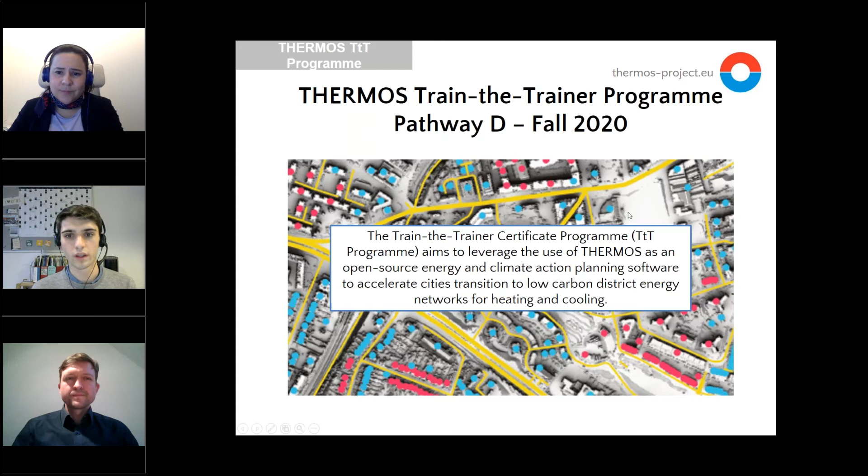So as you already know, this program was divided into 3 different sections. The first was some webinars like the one you are attending right now. So it all started the 29th of October with the kickoff. Then we had a second webinar on the 12th of November about embedding THERMOS in university. And now we have finally our final webinar today. So we hope that you could attend all or most of these webinars. And now we can say with this smiley face that this part is completed.

Also, you had two options for doing the training. The one that most of you selected was option A, completing the 3 exercises. And we already received your exercises. Thank you for your hard work. So we are getting another smiley face here because this is completed. And finally, option B, which was selected by a few of you, was developing a case study with THERMOS. So this also came to an end already. So we can say that finally our Train the Trainers program is finished and complete with this final webinar.

And now, so that you can see a bit the numbers on the results of the program overall. Well, before, of course, you're getting a certificate for completing the program. So congratulations for that. We will talk about that later. And now, as said, I would like to show this graphic you can see here with the numbers of all the different trainings we had in these past 2 years.

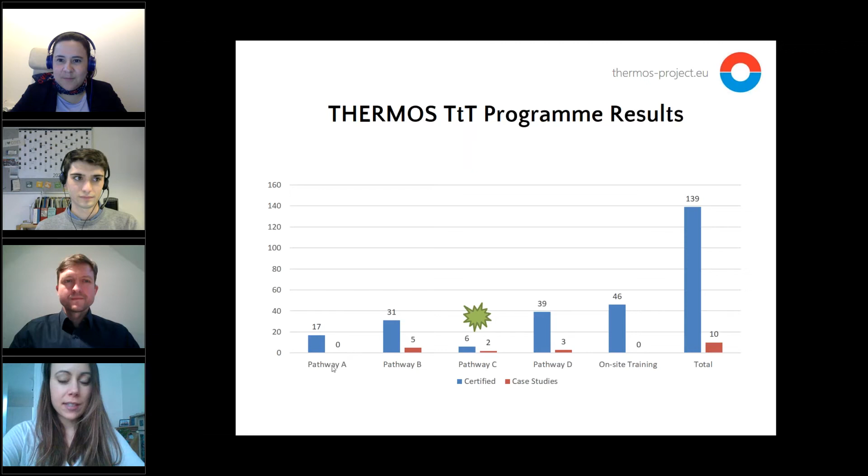Thank you, Julian, for presenting the numbers. Like you said, we're really happy about all the great engagement with you. And having said that, I'm very happy to give the word to 2 of our outstanding trainers. The first one is Luis. I hope I pronounced it correctly. He was a trainer in our previous program. And he's exceptionally committed because he also did a training with our partner city Cascais. So he's really a renowned expert. Please tell us more, Luis, about your case.

Hi, good afternoon to all. It's my pleasure to be here and try to represent Cascais and the case study that I developed in the previous Train the Trainer session and workshop from THERMOS. And again, thank you for the invitation.

I will try to present my, let me. I don't know if I'm allowed to present my screen. I think you should be. Okay, I will show you my screen. Can you just check if you are? Yes, we can see it.

Okay, so I'm here to present the case study for Cascais, Portugal. This, like I was saying, was developed in the previous training pathway. So besides everything that you already know about THERMOS, it is free web-based software to design and optimize district energy network planning processes. And besides all the objectives that you already know, I think the key additional uses that the tool can support are to analyze key solutions for greenhouse gas emissions and air pollutant emission reduction solutions for the city regarding the heating and cooling supply.

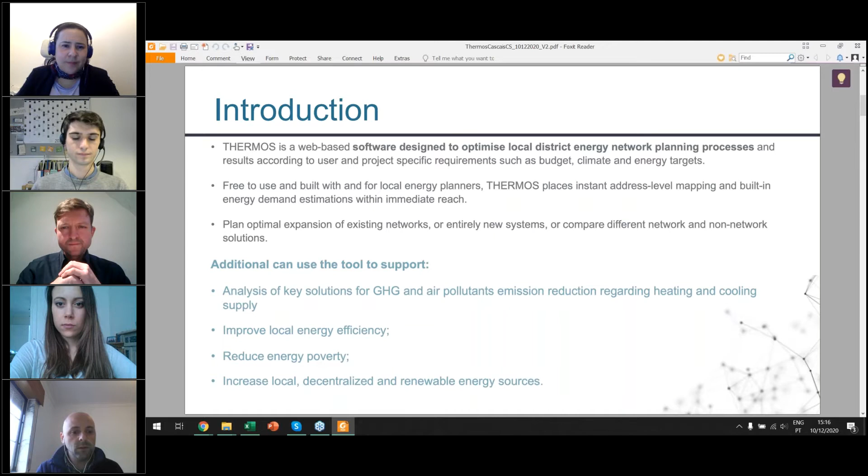It also helps you to identify, in what concerns heating and cooling, how to improve local energy efficiency, also in buildings. And also really important, it can be used to analyze how to reduce energy poverty in the municipality or in the city or the region that is under the cover of the network. And as more general objectives, it can help to increase the local and decentralized renewable energy sources.

And talking specifically about the case of Cascais. I will present where it is for those who don't know where Cascais is. Cascais municipality has been actively engaged in both promotion of energy efficiency and support of innovative and sustainable solutions at the city scale. In terms of climate goals, Cascais is also part of the Covenant of Mayors, and they set a goal to reduce by at least 40% the greenhouse gas emissions by 2030.

But of course, Cascais is really active in this matter, so for the city it is not enough. So they have also implemented climate action policy on the adaptation side. So if things get worse, they are already planning how to adapt to climate change. And regarding mitigation, they are also aligned with national pledges that are really strong for carbon neutrality. So the city has developed a carbon neutrality plan by 2050.

And also in line with the national pledges regarding energy, the municipality is developing the local energy strategy with a 10-year implementation period that is in line with the national energy and climate plan. So this is just to give you an overview of the energy and climate goals that the city is setting.

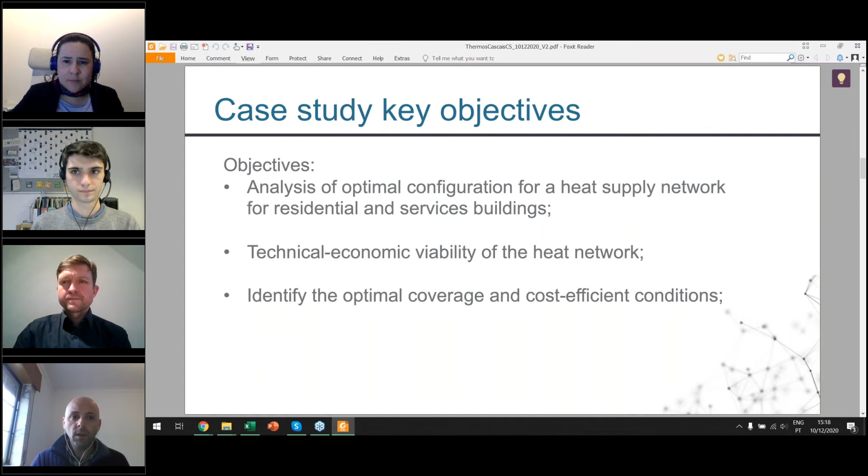So the location of Cascais. Cascais is located in Portugal, near the capital, Lisbon, that is more or less here, and is a relatively medium-sized municipality with around 200,000 inhabitants. And the specific case study was located in Carcavelos, a parish of the Cascais municipality. So Cascais municipality is all of this, composed of 4 parishes. This was revised some years ago.

And the case study is one of the regions here that is close to the sea, and it is experiencing a high urbanization rate, so the population living there is increasing. Also, I provided here on the right side two maps that basically show the climatic zones in Portugal, just to show that Cascais is not located in the region with the highest necessity for heating, but more importantly for cooling.

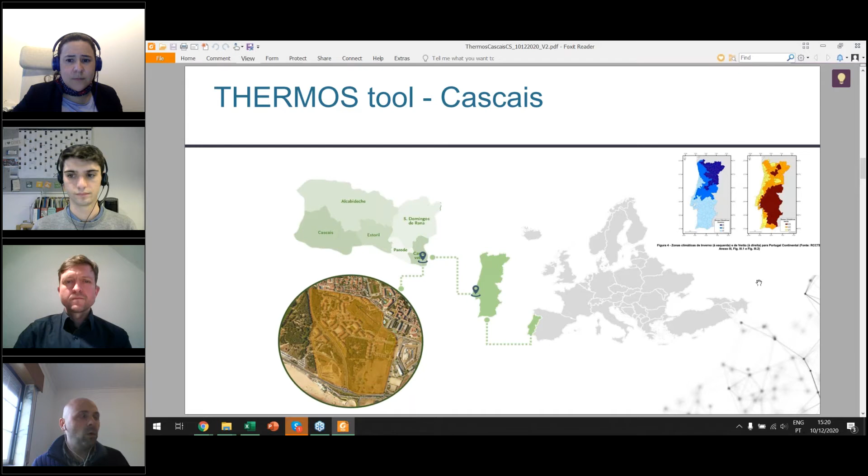Nevertheless, this can be the case study. The importance of this kind of district heating is also relevant for the municipality to analyze what can be the optimal conditions for this kind of possibility for availability of heat for the population.

Here is the map that I developed with the THERMOS tool. So this region, Carcavelos Sul, is an urban area located in the south of the Carcavelos parish, like I was saying. It is composed of residential and service buildings. This is really important because it gives insights into the conditions of buildings with mixed uses, so consequently mixed demands. And the area is around 47 hectares, so it's quite small, and has around 1,500 households and 2,500 citizens.

This is important in terms of more technical conditions. The municipality provided me the shapefile, so I didn't use the default information in the THERMOS tool. This is quite relevant because I had really detailed information about the buildings located in this region.

So, like you already know, and you already did in your case studies, the first stage is the characterization of the initial conditions on both the demand and supply sides. In terms of demand, I identified and classified all the buildings to be part of the network. Like you say, you can classify them as required, optional, or exclude buildings from the solution. And also, you need to characterize the energy demands.

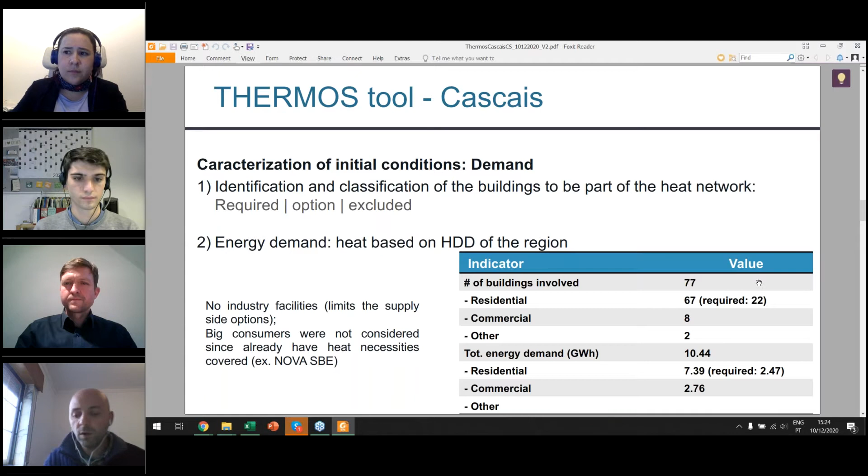That, for instance, there is a new university located in this region, but it was not considered because they already cover their heat necessities with other technologies. Also, the characterization of the initial condition on the supply side. Like I was saying, we don't have industry, so we didn't have the possibility to use heat from industries.

So what we made, we added a new possibility for supply. In this case, combined heat and power plants supplied by natural gas with a maximum capacity of 10 megawatts with different parameters in terms of cost. I will not enter in detail, but you can see it here. Also, the associated emission factor with natural gas. And also, we made the connection of the supply facility with two possibilities to connect, because it was important to try to analyze which routes the model chose, depending on the region or the buildings that the model chose to cover in terms of heat.

Also, really important, we tested two scenarios with tariffs. So two prices for heat, and the two prices were obtained from publicly available information for the only company in Portugal that owns a district heating network in Portugal, Climaespaço. So we used two scenarios with prices from 2015 and 2018. One of the prices is higher and the other one is lower, just to analyze the effect of this variability in terms of price on the configuration of the heat supply network.

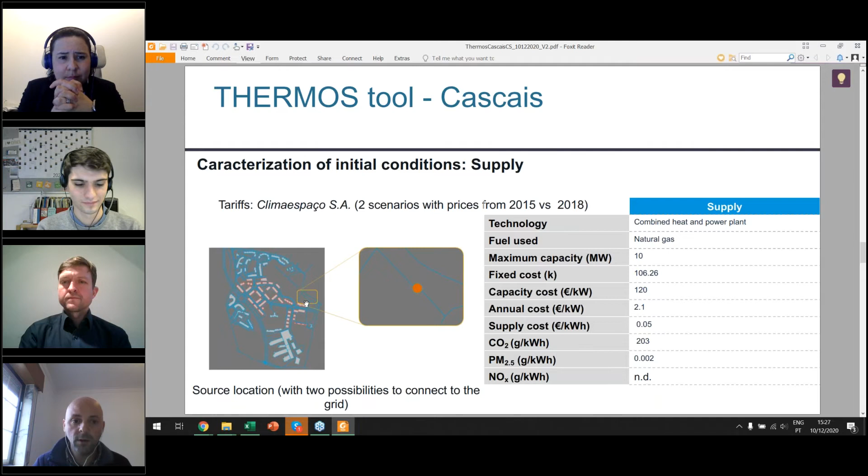Other really important parameters were the technical economic parameters for pipelines. They were different depending on the roads or area characteristics, in terms of hard and soft. This is also default information by the model, but this information was further aligned with other case studies at the time, Granollers, and we aligned this information with their case study, because these are really important parameters for the results of the model. Also, I included insulation measures for walls, roof, and floors from a European project that's called Prioritee.

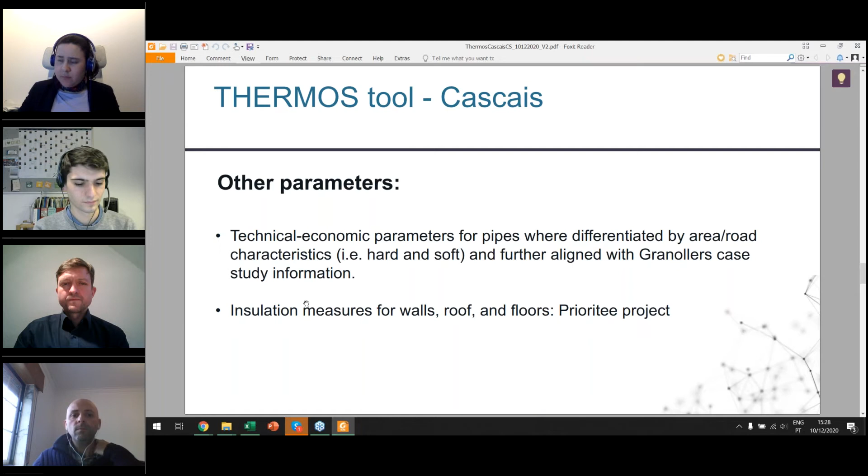In terms of results, after some difficulties in achieving an optimal result because of some networks that were not totally linked, in the end the results were quite good, and the model provided a solution for a network that was able to cover 34 buildings, and the interesting part was the 22 required, of course, but also the network covered 12 optional buildings. The majority of the buildings included in the solution were mixed use, residential and services, and the network covered 44% of the demand. So this means that more than 46% of the buildings that were classified as optional were included in the solution.

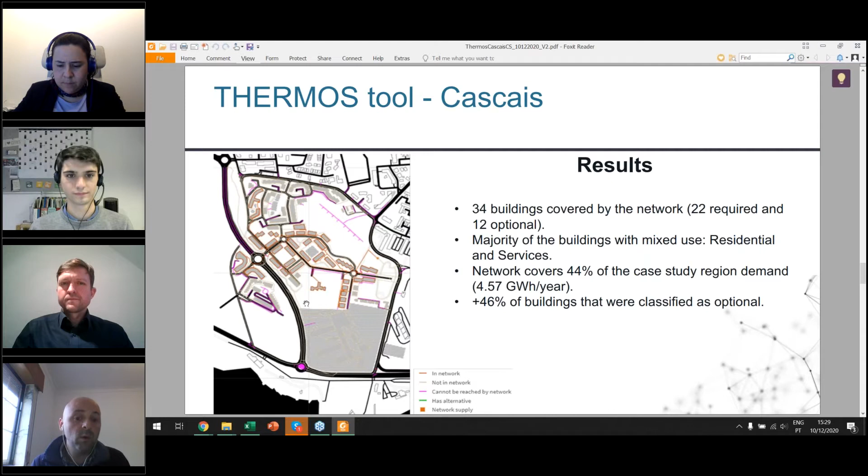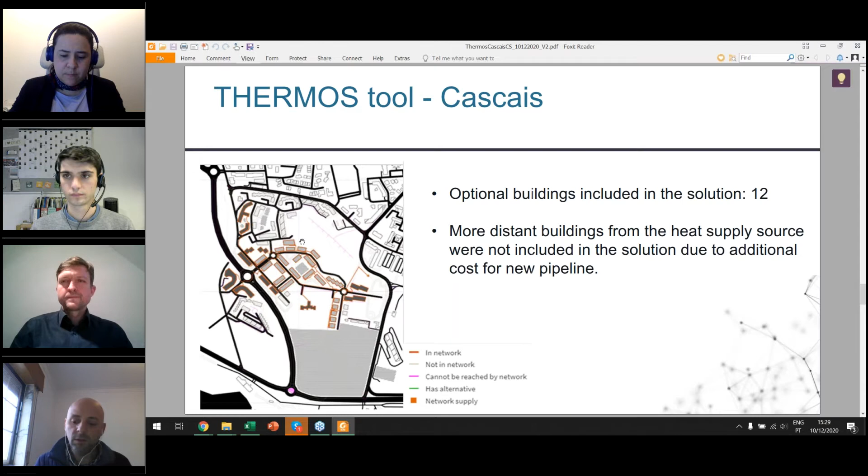So like I was saying, the optional buildings that are here in the figure in dark gray were 12 buildings, and the more distant buildings from the heat supply source were not included, because to include these buildings that are more here in the north part will require additional pipeline, and so additional costs, and so the model didn't provide this solution.

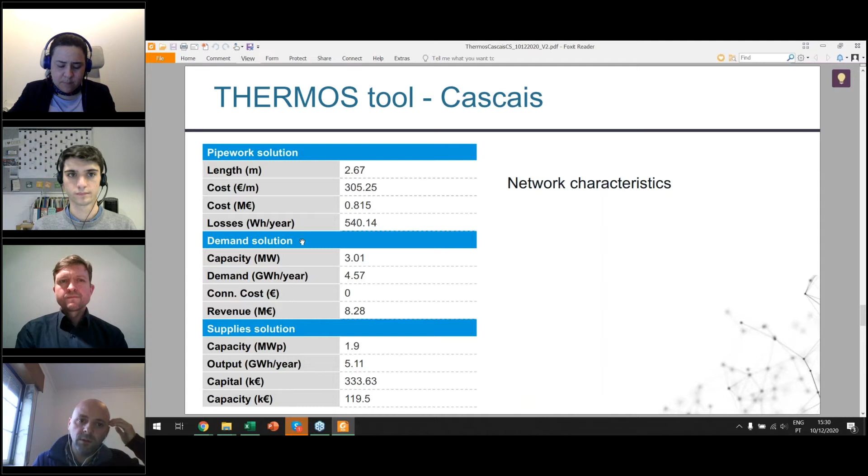This is just a list of the characteristics of the network. I know that in this new version of the software, you have this information more organized. But basically, this is just the solution that we obtained from the software, the cost, the demand solution that I was talking about. But I will not enter in detail because it's really specific. Also, the economic results of the model. But I want to present this figure because it is really relevant and it summarizes the results.

So basically, this is the cash flow of the heat network solution for the case study, and you can see here that this heat network only begins to be profitable after 29 years. So this is really difficult to try to convince an investor in terms of the profitability of this network. And this was only obtained when we defined the tariff cost higher. So this indicates that only with higher heat costs is the heat network profitable. This is important because the project also has to invest in the supply technology. Again, we don't have industry heat that we can use.

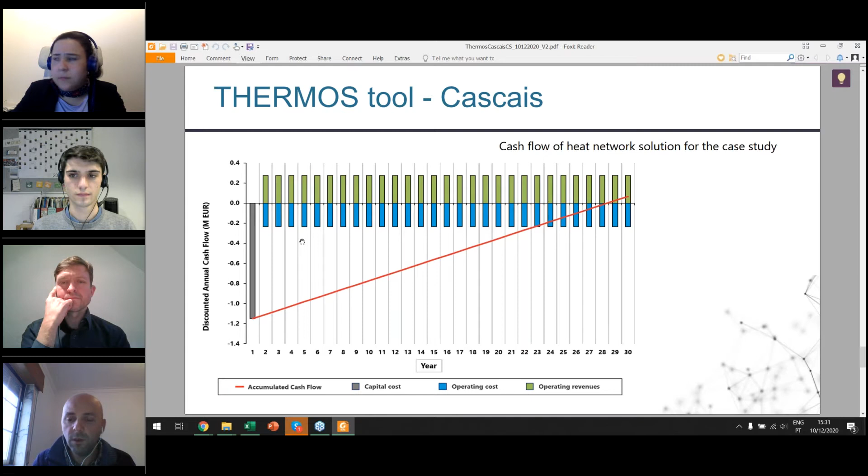So in terms of conclusion, this was the first technical economic feasibility analysis of a heat supply network for the Cascais and Carcavelos region.

To point out that the optimization is really sensitive to key parameters. So the heat demand, the tariffs, the investment costs, also the generation technology that you defined, and the network costs, and also the type of buildings that is linked with the heat demand. I think these are the key parameters. Of course, there are others that are also important, but these, from my perspective and from my analysis, are the most

determinant. So I think in terms of investment in information collection and information detail, it should focus here. And I also advise to make scenarios and try different sensitivity analyses, if you can say it like this, and tweak all these parameters in your case studies.

So also for the case study, at the time we had limitations in terms of options for heat supply technologies, only natural gas or biomass. We didn't include biomass because of environmental sustainability issues and also economic sustainability issues. Cascais is a really urban region with some agriculture, but we didn't consider biomass because of availability and cost of the resource. Biomass power plants are not being considered at all in Portugal, although some centralized ones exist, but with different objectives.

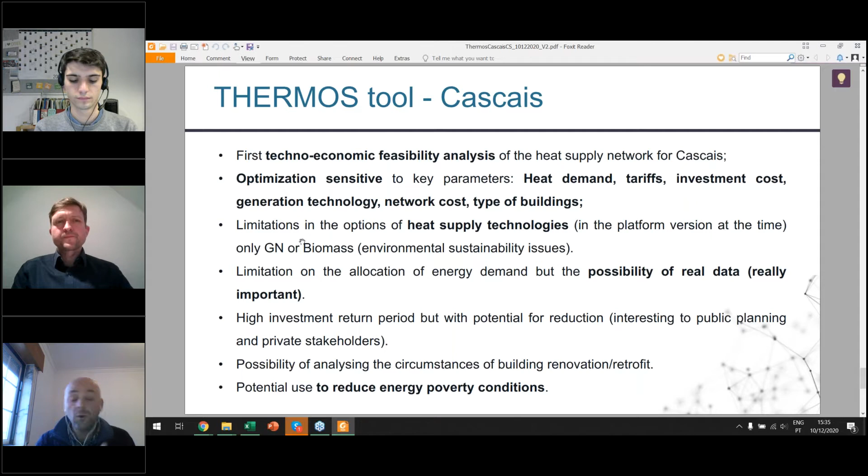Thank you, Luis, for this presentation. I would encourage everybody who has an immediate question to raise their hands or to post a question. I see there's one from Luisa. She thanks you for the presentation, and she would like to know if the network was proposing heat, and I don't know what that means. Can you spell it out for me? District... the heat was required, I think. Yes. And domestic hot water. Okay.

First, the version of the software that I used at the time didn't have the really nice feature that is available now, that is the profile of demand. So I didn't enter in detail the variation across the seasons or the year in terms of heating and cooling at the time. But I think it's really important because you can also define variable tariffs across the year, and it can be really interesting for private investors in terms of supply.

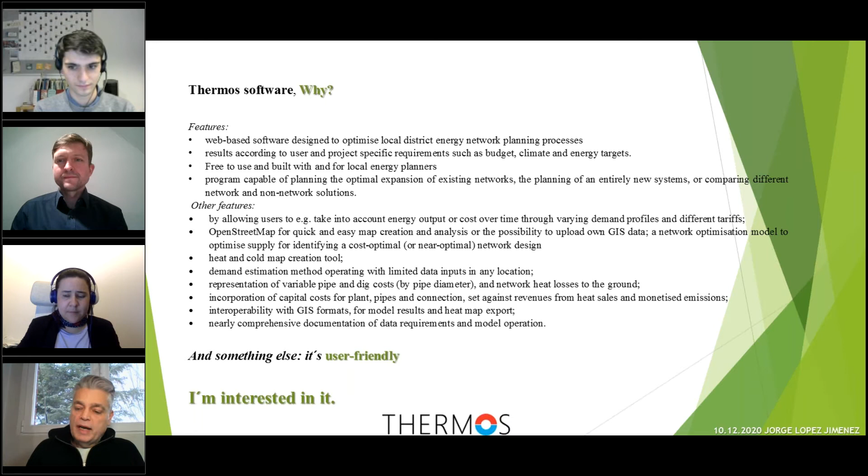Well, the first question is why use it. I started when I knew about THERMOS. I went to the website, saw all these features, and decided to try. These features are extracted from the website. I found the features friendly, so I decided to try. Why not try? This is the real question. So this is my experience.

Well, this is not software for non-experts; it's for people who know how district heating and cooling works, because you must interpret the data. It's not for a beginner. You need to know how district heating works, know the main route you have to construct, because it's very difficult to construct a district heating in a city from scratch, or explore a solution, or if you don't have all the documentation, you must know something about the subject.

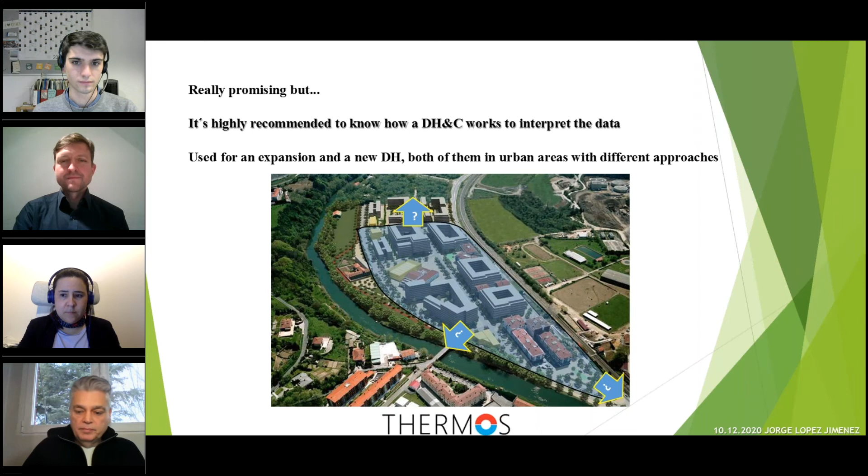Well, this was my first stumble. The program only works with a 17 HDD base temperature. It's a good base, but for Portugal and Spain, I think other bases fit better. So I propose that you can choose other bases, because sometimes you are more familiar with other bases, or other bases fit your area better.

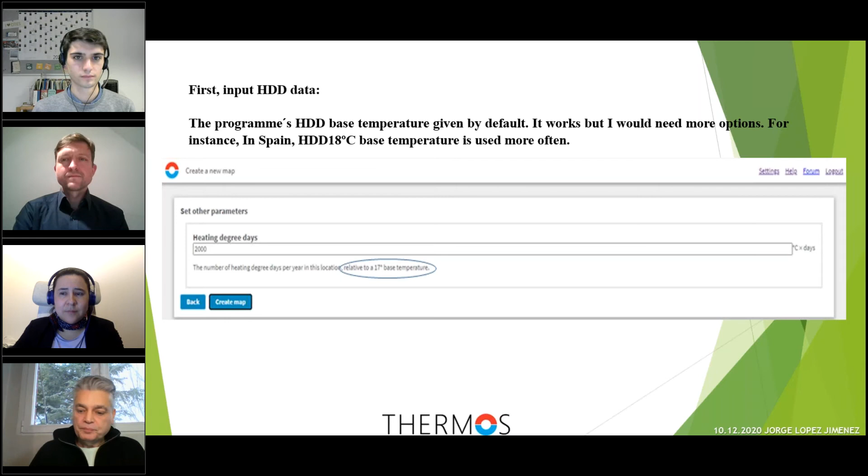Well, the second was about the maps and network. This feature is really easy to use. It contains some bugs, but if you have some experience in district heating, it's very easy to fix them, because you can connect, create new paths, create new buildings. So it's easy, and it's not important.

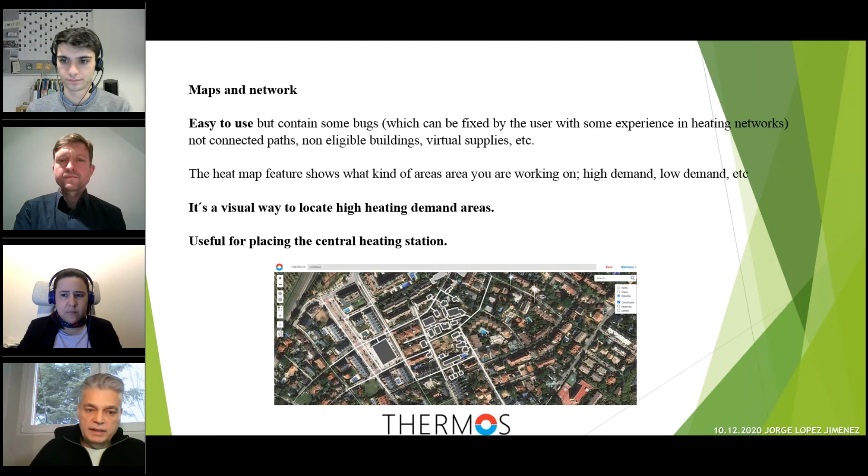The maps and network allow you to know high heating demand areas and other relevant information. Of course, it's useful to place the central heating station, because you may have several sites, and you can try to set the center wherever you want on the map, and it's very easy, very friendly.

About the network and consumption, it's not a problem, because you can always complete the consumption with real data. You can mix real data with the assumptions the program makes. So it's very easy, but sometimes it's necessary to calibrate, because if you have real data for a few buildings, you can easily improve the accuracy of the result.

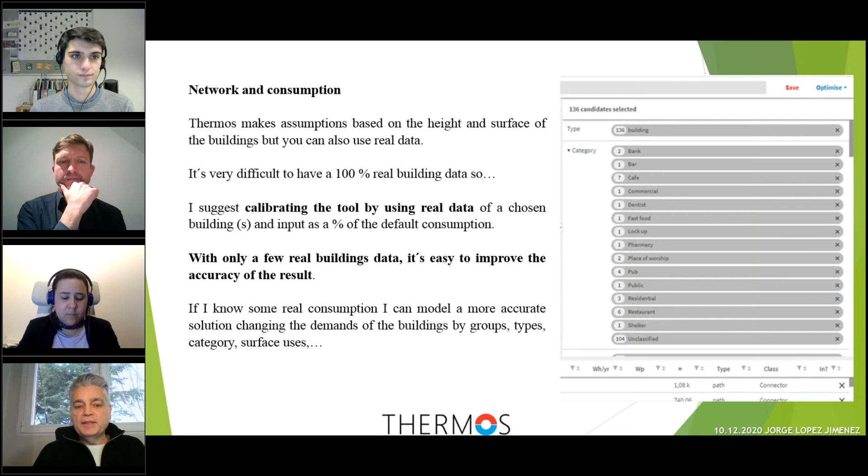Well, about technologies. It's like the Paul Newman movie, if you know it, Cool Hand Luke: what we have here is a failure to communicate. Because nowadays you need to use low carbon energies, because district heating needs the support of public entities. Public entities are aligned with European regulations, so they push us to use low carbon energy.

So maybe with biomass and other renewables, the cases will be more attractive for public entities, and you need the support of the public entity to develop district heating, because it affects urban areas, public infrastructure, and all that kind of infrastructure.

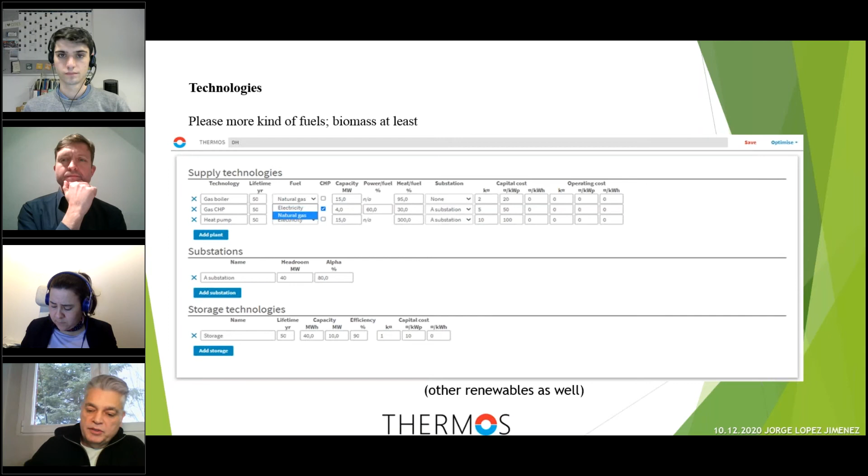About the solution summary, well, it's very complete. You can see the whole route with all the diameters. You have a simple business plan, but you need to improve this plan, because you have to know how you are going to finance it. Maybe you have subsidies, or you have funds, or you have shareholders. So you have the main features, but you need to develop a new business plan.

Well, the export of the tool now is limited. You can only print the screen, and sometimes it's difficult to work in other programs. But it's a good thing because you have the information, but you have to translate it by hand. But this is the key: you had better have an idea of the subject, because if you don't know about the subject, it's impossible to interpret the whole information and the idea of the district heating.

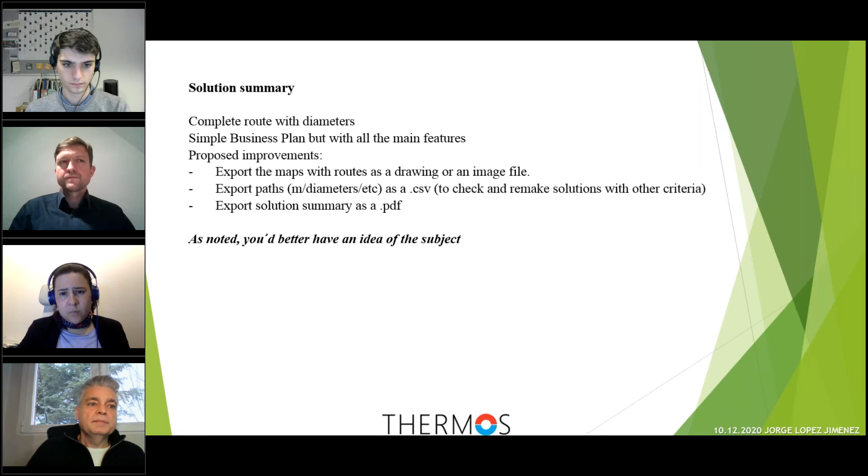Well, this is my conclusion with 6 cases. The core of this came from a discussion with Juan, Paolo, and Julen, who sent me some emails about how it could be. So this is the conclusion. The energetic results of the tool are pretty accurate, but we need some kind of input in order to calibrate the tool, because sometimes you have real data, and you can calibrate and have a more accurate solution.

The economical results are not as precise, but it's a kind of figure that you can work on. So if you have the diameters, if you have the route, if you have the path, you can calculate substations, the central power station, and other infrastructure that you're going to need. So it's a point to start.

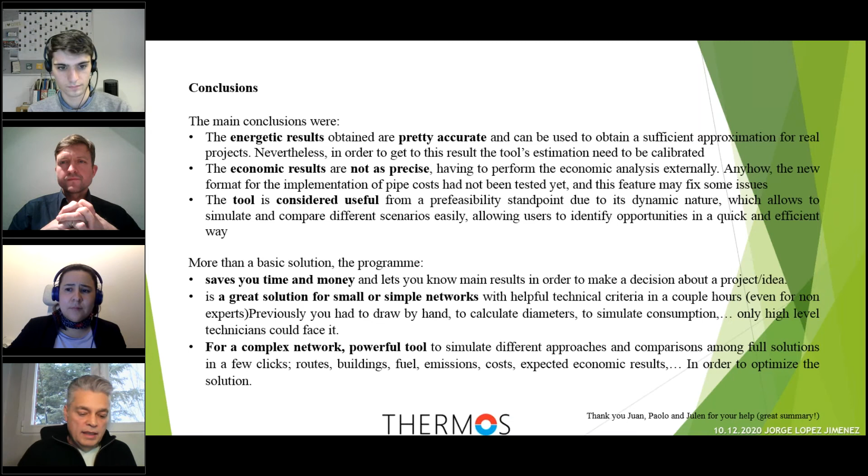For a complex network, you have to do a lot of versions. I remember a case in which I used more than 100 versions because I had to place the power station, I had to see the optimal route, I had to change some buildings, I had to add real data. So it was a mix, but it's a powerful tool because it allows you to simulate different approaches and compare them. In a couple of clicks you have different options.

Well, and now that Christmas is coming, this is my letter. Thank you very much. Sorry, my letter was out. The letter, yeah, we need to see your letter.

Thank you very much. We are a little short of time, but we have to give some minutes for questions for Jorge, and you have also raised several issues. As I said before, we have our technical team here, so we would like to answer you. Specifically on the issue about needing more choice of fuels to include in the model, I would like to give the floor to Martin. Perhaps you can tell us how we can address this in the tool. Martin?

Yeah, hi everyone. Hopefully everyone can see me and hear me. Yeah, thanks, we can see and hear you. Good. Thanks, Jorge. That was a really interesting presentation, and also from Luis before.

Some really interesting points you brought up there, and we are aware of some of those, and we are working on some solutions to address them, to make it a more robust, easier tool to use. But on the point about fuels, you said it could do with having more fuels as an option. You can actually add that. Perhaps we could make that a bit more obvious, but under the supply side, when you're defining the supply profile, you can add different fuels under the fuels section, with prices and associated emissions.

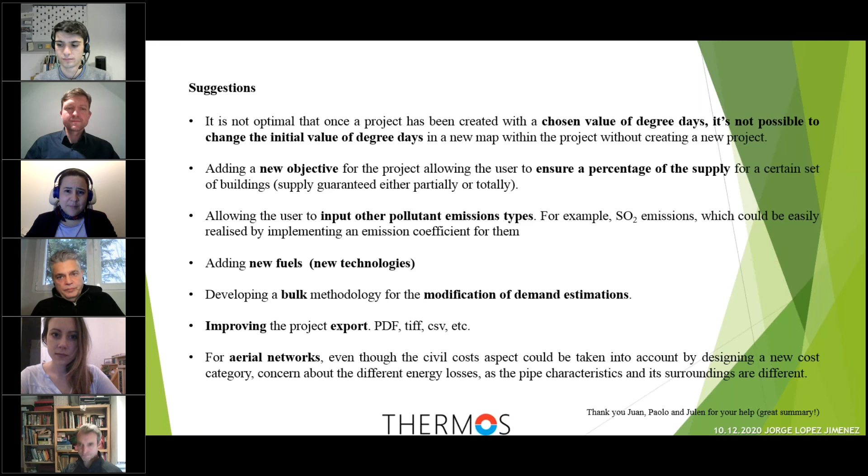But I won't go on, because I think we're running out of time. But thanks for those. No, thank you very much. I use the inputs of new fuels, but I think it's very important for someone that doesn't know different fuels. Yeah, definitely. Thank you very much, Jorge.

I think that this Christmas letter to the kings is our work in the project THERMOS to make them real, and hopefully we will be able to address all these in the following months. We will be in touch. You are in touch with our team in Spain, also with Julen and myself. We are here open to help you in anything that we can.

Thank you very much, Jorge. You've been of great value for us, and hopefully you are inspiring other trainers to develop more than one case, 6, 7 or more. Thank you very much. Thank you all, and great job.

Setting the bar high. Actually, it's good that Martin already took the word, because I think it's time for Martin and Carsten. And it's time for our award ceremony, because of course we want to recognize your efforts and all the feedback you've given us and all the time you invested in testing the tool with us, and going through our exercises. So please bring on the ceremonial atmosphere. Yes, please. In this regard, I think Martin was going to say a few words now as this is ending, of what will happen with the THERMOS tool. Some input from you, Martin.